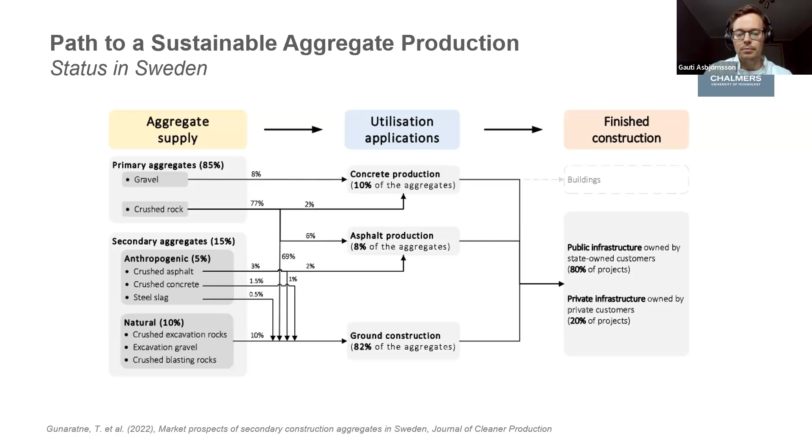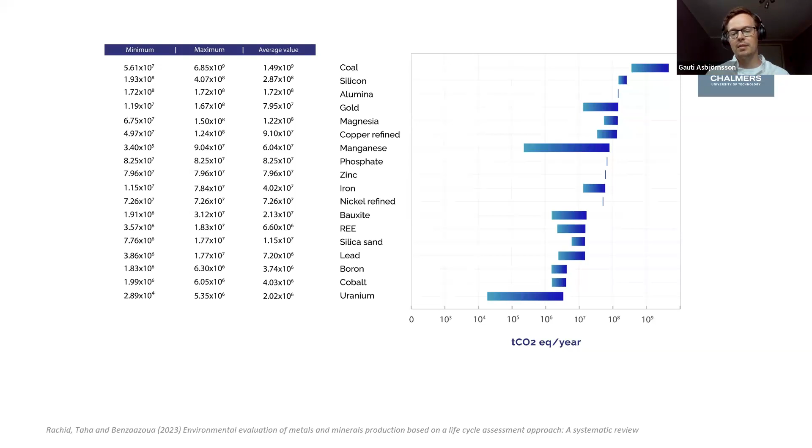But when I looked at this, I saw they don't include aggregates. Usually when looking at aggregates per ton produced, the impact is fairly low compared to minerals, because there's additional processing needed that contributes to the average value. But with the sheer amount of aggregates we're using - for 2023 there's a prediction we'll be using around 47.5 billion metric tons worldwide for aggregates.

If we assume an average emission between 3 and 6 kilograms CO2 per ton, we actually get 1.5 to 3 times 10 to the power 8 tons CO2 equivalent per year. That puts this quite high up on the scale, mostly due to the sheer amount of aggregates we need to produce to maintain and develop our infrastructure.

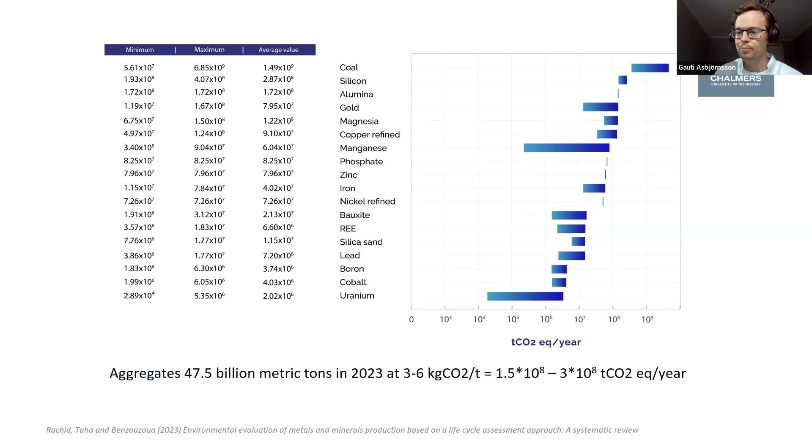As I mentioned, the Agenda 2030 - we should all be aware of that. The main goal is to achieve net zero CO2 emissions by 2050, with some variations. As I mentioned, Sweden aims to reach this by 2045 - why, I'm not sure, but they might want to be a bit ahead of the curve. We also have national incentives - this is from the Swedish Aggregate Producers Association, who in 2019 created a roadmap of their efforts to reach net zero by 2045.

And this is kind of how they aim to prioritize their efforts in the coming years. So currently they are focusing on electrification. It started in 2019, and their electrification phase is six years, ending in 2025.

We have been involved in the project, measuring the load that mobile crushers have on the grid, and looking into different renewable energy sources, battery solutions, transformers, and so on, mostly to simplify things for small producers relying on fossil fuel for their mobile crushers, to connect them to the grid and make it more economically feasible.

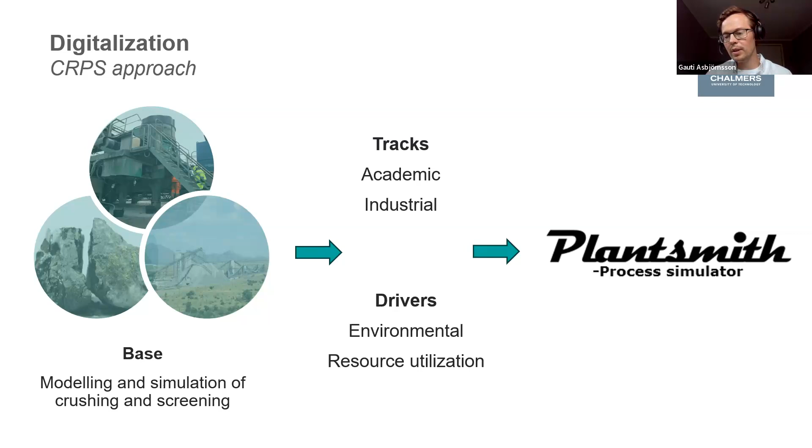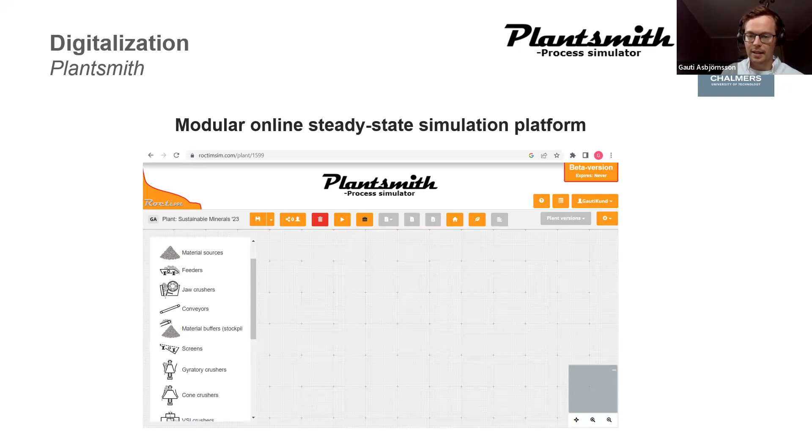And it's fairly easy to create your own flow sheets - it's a drag and drop application. The front end, as I mentioned, is online, so it's HTML and CSS coded with JavaScript for the functionality. And what we're basically doing in the simulator is the mass and energy balance of the circuit.

We have the model library, which is continuously being upgraded and extended. We have nice uploading capabilities with standardized modeling templates, making it fairly quick and easy to create new models and implement them.

Everything is stored in a GitHub repository, both the front end and the back end core code. And we have a customizable interface, and also user management - so depending on what user access you have, this can be customized depending on who is actually logging into the software. And in the end, we have API communication capabilities, creating the possibility to connect to external software and databases to include in the evaluation.

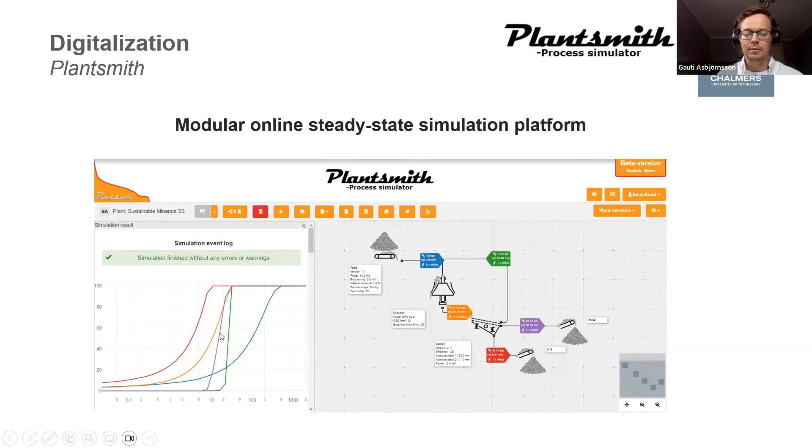What we get here is the particle size distribution. We get the specific energy of all the streams. We get the conversion for the different properties in our stream - the density, the mass, the moisture - all included in our streaming properties.

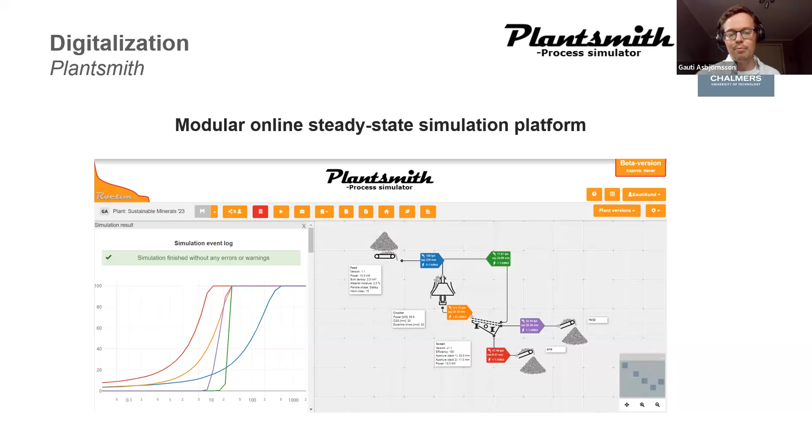So now that we had the base for the process simulations, we needed to think about how to include the environmental aspects, because they are quite spatial and temporal dependent on where we are. So we needed a structured format to implement the environmental aspect correctly from the start.

In 2018, we were granted funding for a pre-study. We had started looking into environmental aspects a little before that, and what we converged into was the environmental product declarations.

These are standardized formats based on the standard ISO 14025. This is environmental labels, and they consider the full life cycle assessment of goods and services, or products in this case, as we have for the aggregates.

There are three main components we are looking into. First, the product category rules - they define the scope of the life cycle assessment, how we set the frames, the system boundaries, and set up the rules for doing the LCA.

Then the LCA study is the backbone where we actually quantify the environmental impact, assessing both environmental and human health impacts. That is based on the rules and guidelines from the product category rules.

The EPD report is the summarization of the LCA report, as well as the interpretation of the results based on the product that you have.

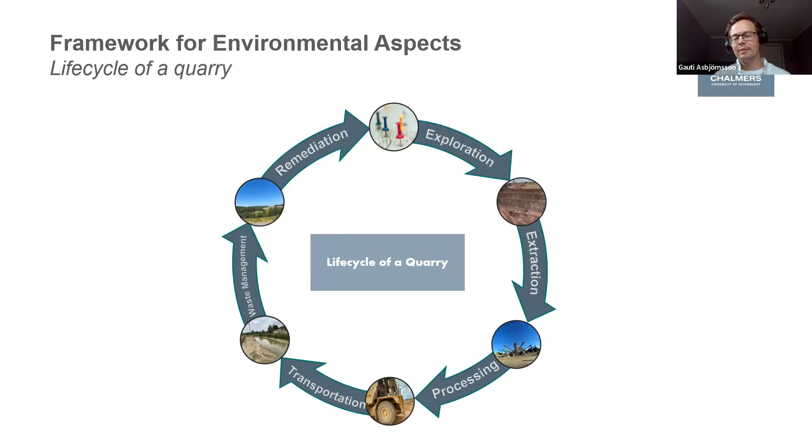So this is not really the focus of the EPD to look at the complete life cycle of the quarry. Instead, we are looking into the life cycle of the aggregates instead. But you can still see a similar trend here.

They still need to extract the material, transport it, and manufacture it. So this is the core that we are looking into in the mining operation or quarry operation. This is usually what we are focusing in on and what we can do the simulation on.

But we also need to note, the transport to customer is an optional section in the EPD for aggregates. And quite often this varies a lot, so it's difficult to determine a single distance to do the evaluation on.

But what we also need to do in the EPD is look at end of life and benefits beyond the system boundaries in the end. And these are scenario-based, looking into the possibilities in the future when we need to recycle the aggregates in a specific application.

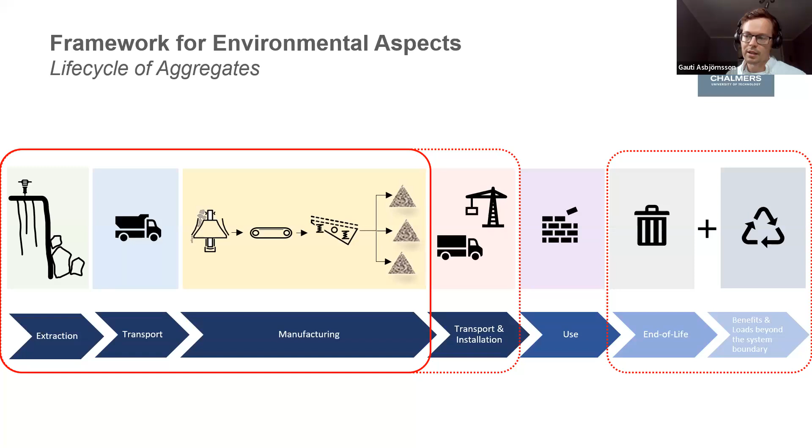But as I mentioned, we are focusing on the extraction, transport, and manufacturing process. That's what we can actually simulate.

And if we look a little more in detail into that, what we are looking into is all the consumables and the production at different stages.

So looking into the A1, where we have raw material, drilling and blasting, or site preparation, then we are integrating the amount of explosives used over a year, the amount of diesel consumed, even electricity.

The transport, we account for the diesel consumption and the chemicals used, also oils if there's maintenance needed on the equipment. And in A3, the manufacturing itself, it contains everything consumed within the process: lubricants, salt, chemicals, water, rubber, metal, electricity, diesel even, if you're running a stationary or mobile unit.

And what we get out of the system is our products. So usually we refer to product groups, not specific products. And then of course we get some waste, either mixed, hazardous, or inert material. So these all need to be accounted for when we do the estimation for a process over a year.

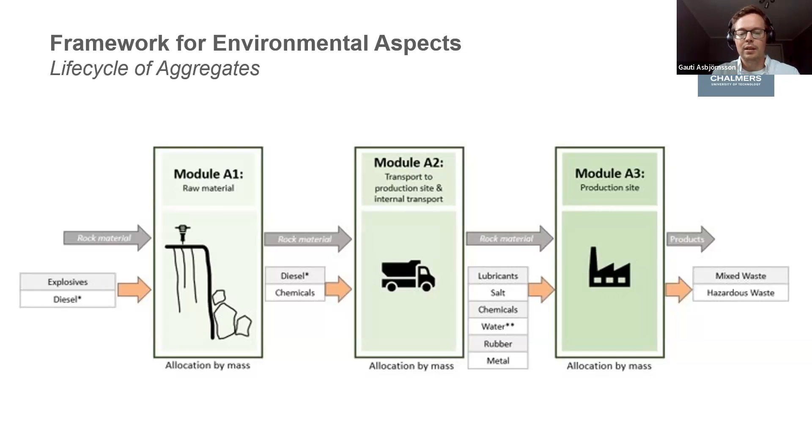And in the back end, for example, when we are looking into the drilling and blasting operation, especially the blasting operation, we have in our database LCA models for the blasting. So that accounts for, starting here, both the explosives.

So we are using GaBi from Sphera for our LCA modeling.

So for the blasting, we both need explosives and foam, for example, and electrical detonators. And those need to be transported to site with a truck or similar equipment.

So then when we're doing the blasting operation itself, we need to have a model for that as well. So all the steps needed for transporting the explosives and the detonators to site, as well as the blasting, we need an LCA model to quantify the emissions or compounds released during the different steps of the blasting and manufacturing of the explosives.

So, as I mentioned, we have an LCA database with parameterized models. In this case, we have it per kilogram explosive, so that is then scaled up if you need 10 tons, 100 tons, 1,000 tons. The emission is then just scaled up with the amount that we are actually utilizing. They are accessible through an API.

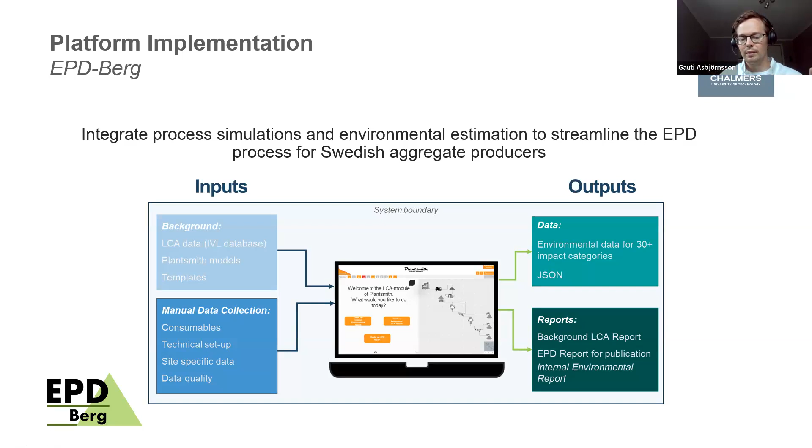So with a system in place, there are additional capabilities that we can do with it with minor modifications, meaning that we could extract cloud data instead of entering it manually. We can connect through the additional system with an API.

We can automatically send the results both to verification - the report itself and the JSON file. The idea is that the files that are generated are Word files, so they can be customized by the producers. The JSON file will more or less be locked data, but it's readable, and that can be easily transferred into machine readable files that can be used by additional systems that need the environmental aspects, for example different BIM softwares.

So this is the modification that was done. We added an additional tab within the process simulator where you fill in all the information that is site specific - the production, the amount of consumables, the allocation matrix, so how you are allocating different resources onto different product groups, and then the result itself. They are then generated into both the EPD report and the LCA report, and the JSON file. So it can all be generated with a click of a button.

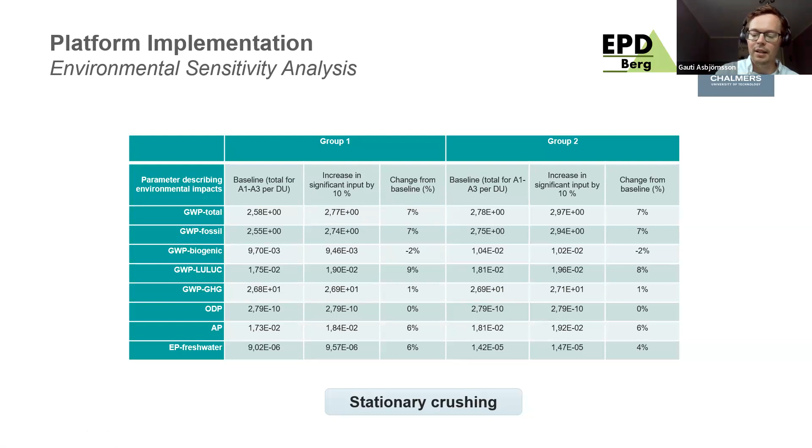So when we were at the end of the second phase of the EPD-Berg, creating the demonstrator I've gone through with you guys now, we had the opportunity to join different European projects and use parts of the software in a larger system. Since we designed it from the beginning to be modular, it was quite convenient to integrate with external systems.

So I'm going to start with the DigiEcoQuarry. We are about 2 years into the project - it started 2 years ago and we have 2 years left. As I mentioned before, the possibility to integrate cloud data through an API was always kind of intended with the platform.

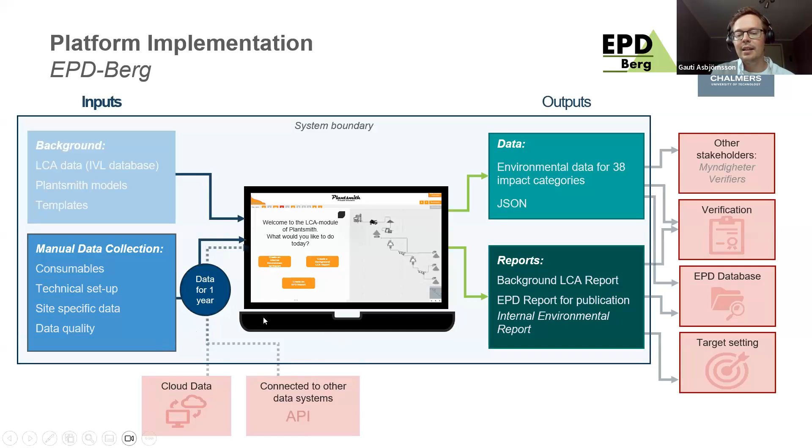That's basically what we're achieving here with the DigiEcoQuarry, where the focus is on creating what we call an innovative quarry system, the IQS, where the aim is to combine all sensors, processes, tools, and methods within the process, adding multiple sensors as well, and have it all stored in the same location in real time, in a single system.

The aim is not only increasing efficiency and profitability, which is of course one of the core aspects, but also how do we integrate health, safety, and environment into a larger platform aimed for production of aggregates.

So this is the structure or system that was proposed in the beginning when we were doing the application itself. In all, we are 25 partners, a good mixture of companies, universities, and research institutes. We have 5 pilot sites within Europe, so it's a nice distribution of both the type of quarries we're looking into and their location.

The biggest purpose was how do we maximize digitalization and automation in the aggregate sector while still being an efficient solution to be implemented by producers.

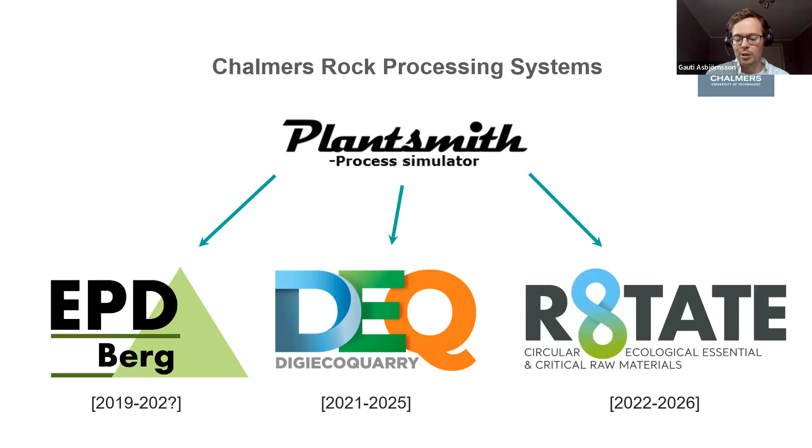So we have, again, 5 sites spread around Europe, and the aim is to create a platform that is more focused on environmental systems - an environmental management system, not a large IoT platform like we're doing in the DigiEcoQuarry. We have a specific focus here. We are delivering circular solutions as one of the work packages we're looking into. We want to decrease cutoff grade, improve extraction processes, and enhance social acceptance. Basically there are 3 pillars that we rely on in this project.

So the first is the processing itself - what technical improvements can we make in the process to reach a little bit more net zero? The second pillar is the circularity aspect, with a large focus on waste valorization - how can we create value from our waste piles? And the third pillar, which we are mostly involved in, is the environmental footprint assessment, creating an environmental management platform.

They recently published in our WP1 report the generic system structure for the platform within R8TATE. So as I mentioned, this is an environmental management system or platform, and what we are looking into in the project is biodiversity, mine closure, risk assessment, energy efficiency, environmental impact, and multi-criteria decision making. So when we have all that information - not only the environmental impact, which is our focus, but biodiversity, risk assessment, energy efficiency - we can make decisions based on these multiple criteria.

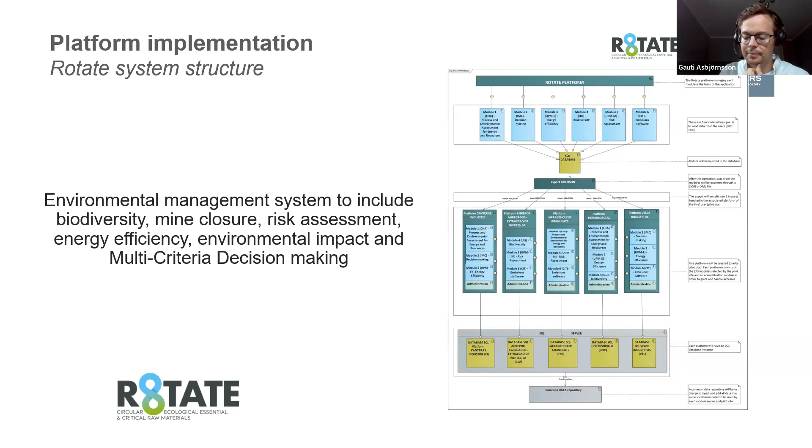So I mean, we don't know how the final solution should look like. We've gotten quite nice input from the producers, what their requirements are and needs, but it's still a kind of working process to find a way forward. But we can see it's gaining momentum.

At least in Sweden, when we started in 2018, asking the companies and getting more information on the environmental aspects, they said no one is asking for this, so why put energy on it? But now they have started calling us, asking is the software ready? Can we use it? So the users, their users, what they are providing.

Hello? No, sorry, it wasn't my intention. Continue, Gauti, no worries, I'm almost finished.

So each platform has a potential of providing more detailed information on the environmental impacts of different quarries and the quarry operation. If you're only looking into the manufacturing of the aggregates, or if you're looking into the drilling and blasting or the transport itself, it can easily be divided up, of course.